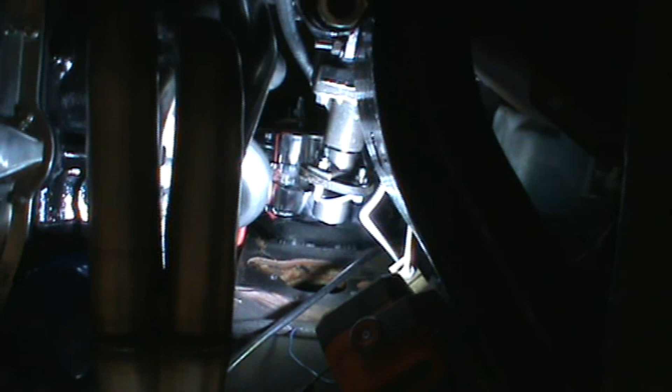You're looking straight up from underneath the car. This is the end of the Borgeson steering gear. This is the hole where the shaft from the steering wheel comes through.

It doesn't look to me, when I go from the other side and look, but I can't get a camera angle on it, that this is lined up with the center of that hole. And that could be a problem because there's not much, if any, movement on the Borgeson unit because those holes are drilled into the frame, and I don't think there's much give there.

There may be a little, and it probably is enough because they're selling this thing. But this part right here is the foam, the carpet padding if you will, from the inside. So that's going to go up some.

And to get the steering column through, there's a lever on it that locks the steering column when you have it in park. So that's got to go through this slot right here as you're putting it in.

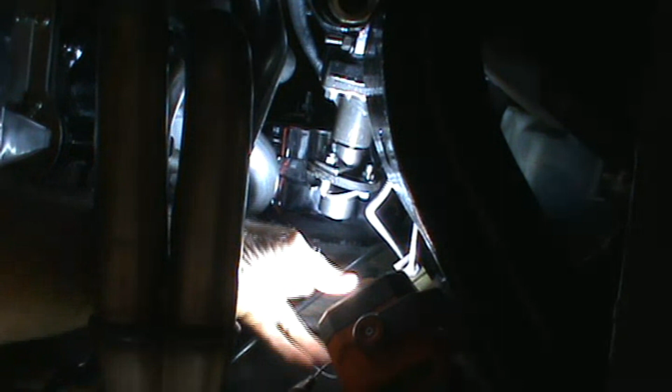And I think there's a plate that I haven't found yet that goes on the outside of this and sandwiches the firewall between it and the plate on the steering column. But one of the things they have you do is measure how far that steering column's got to go in there. And that steering column has to be compressed a little bit.

It's a collapsible steering column for safety issues. But okay, enough about that.

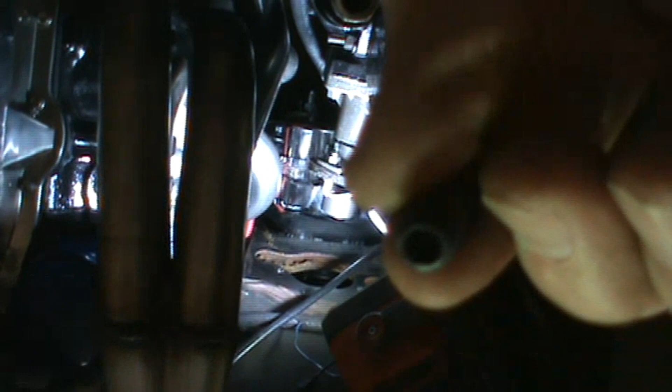What holds it in is a set screw. This is another case where you have a car that's all SAE measurements, and this, I don't know if you can see it here. Let's see if we can turn some light on it. Nope, wrong button.

It has an Allen wrench slot in the head. That's a 4mm Allen wrench that you need to tighten that on with.

And there's a nut that once you get this tight, you screw it in on top of it and it holds it in place. That is a 13mm. So I'm going to just start this a couple threads, not enough to get it through.

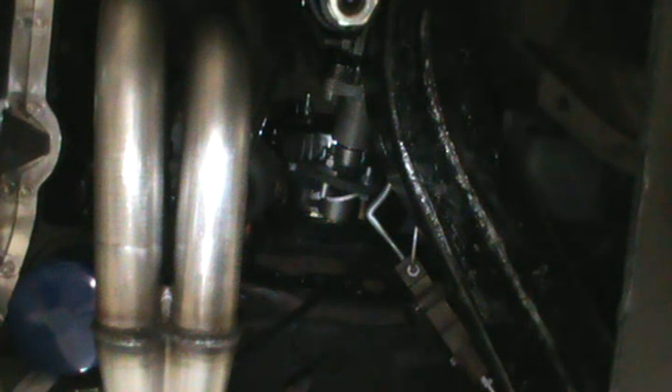That didn't work well. I lost my light. So I'm hoping you can see that. I've got it started in there,

but I'm not putting it in enough that it would hit the steering column. I can just feel it starting to get through. And then, before I lose it, there's a nut

that goes on top of it to lock it in place. That is a 13mm. So try to get that started. But leave enough room so that I can tighten the set screw down on it.

Now they say to measure between here and here, and then add 3/4 of an inch for engagement in the rag joint, which will give us a little bit of flex if it's not lined up perfectly.

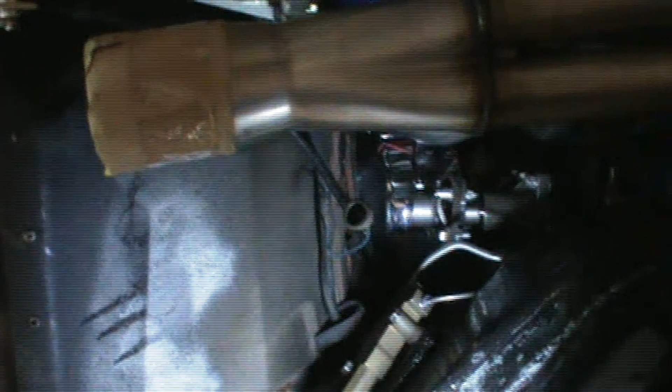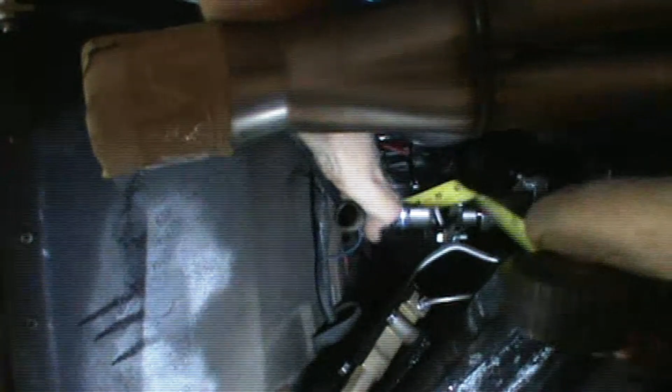So I just went over and confirmed the measurement, 7 1/4, on the other side, on the shaft steering column itself. I'm going to re-measure this. If you've ever done any carpentry work, you've heard the expression measure twice, cut once.

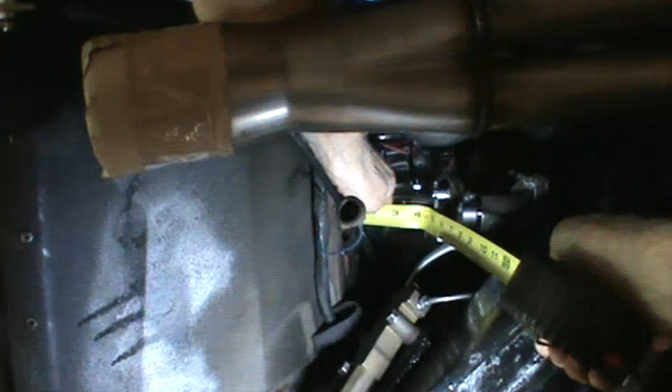I think that applies to steering columns as well. So that looks like about 3 1/4 right there. Add 3/4, I'm sorry, 3 1/2. Add 3/4, and you got 4 1/4. I'd rather make it long than short because they say it's really hard to get it back out. And I was correct in assuming that if I compress that, it's going to take most of the collapsible column out.

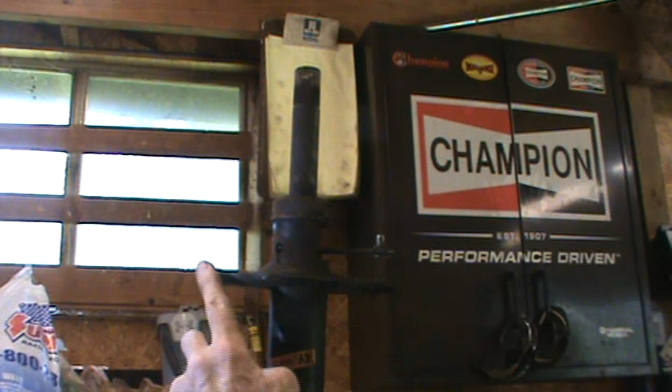Okay, I'm trying to get some light on the subject here so you can see that. I put some light on it, but it's still hard to see, so I'm going to point out this is the plate that goes up against the firewall from the inside.

This is the bracket that is going to go from the outside of the firewall and hold it in place. It's got to go around this. That's why this one screw is just a nut and a bolt with it, a carriage bolt actually, so that there's a square hole here.

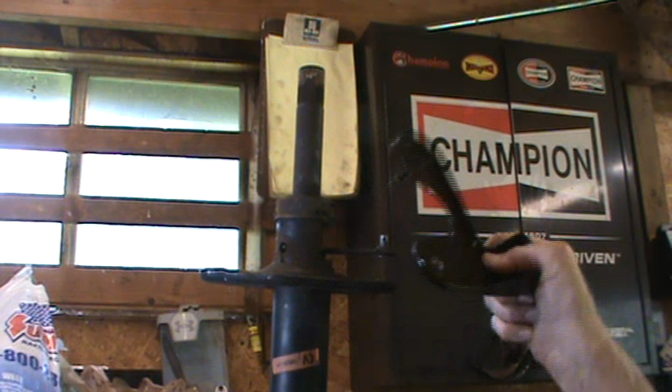But that one is going to go from the outside of the firewall through this, sandwich that thing into the firewall, and then from here to here has to be 4 1/4 inches.

And if I measure from the inside of the firewall, that's probably not going to show up exactly right, but 7 1/4. And I was trying to measure it parallel to the shaft so that I'm more accurate, but due to the camera angle, I'm sure I can't show that. But take my word for it.

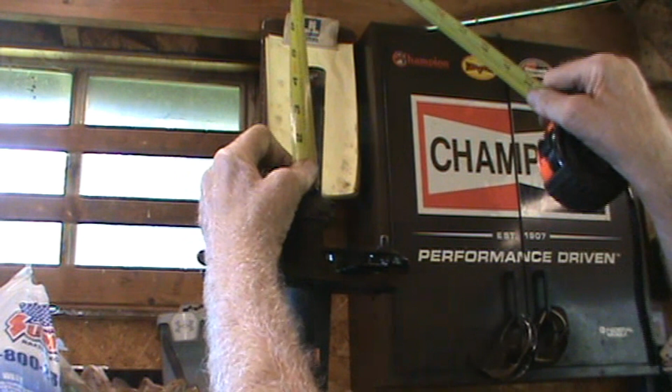So the point is that that shaft has to be compressed 3 inches. 4 1/4, 7 1/4 minus 4 1/4 is 3. So that is basically up to the spline on this thing.

I don't think this part below compresses, but the other issue I may or may not have is whether the plate that goes up against the firewall will go on the shaft itself, will go through the opening that I have between the vintage air conditioning duct and the rest of the gauge cluster, etc., that's up under there.

So, and I think actually this lever, the steering wheel lock, is in the - I kind of misspoke before. The steering wheel lock is in there.

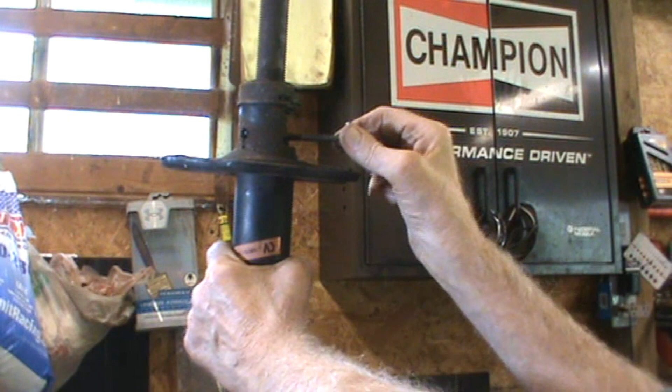So I'm sure that when I unlock the steering column, this will move, and that goes to the transmission to keep you from taking it out of park unless you actually have a key. So-

I think my next move is going to be to just see if I can get that thing in through the vintage air duct and under the steering column, or under the dashboard. I guess I should compress it some of the way before I do that. They didn't give you any tips on how to compress it, so I'm gonna double check 3 inches. From there, 3 inches is right there, right at the splines for the thing.

So I think I'll compress it some, confirm that I can get it in through the vintage air ducts without disassembling some of that, and then put it in and do kind of a test fit, because the last thing I want to do is push that thing too far in. I'm pretty sure my measurements are accurate, but it would be a disaster if I pushed it in too far and can't get it back out.

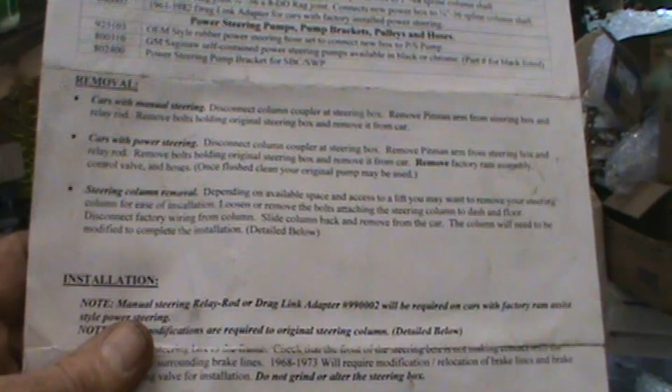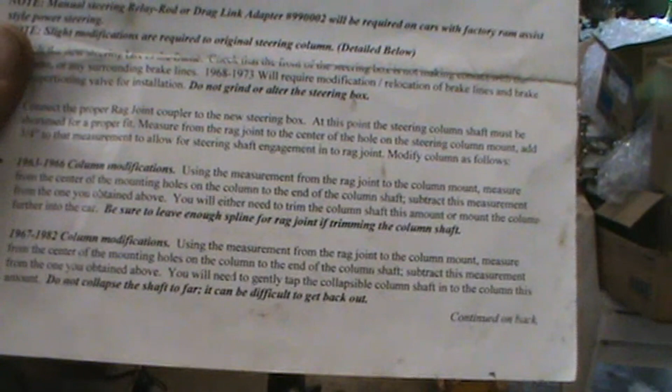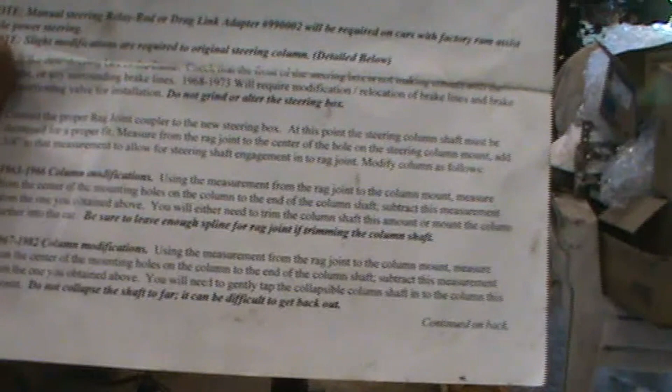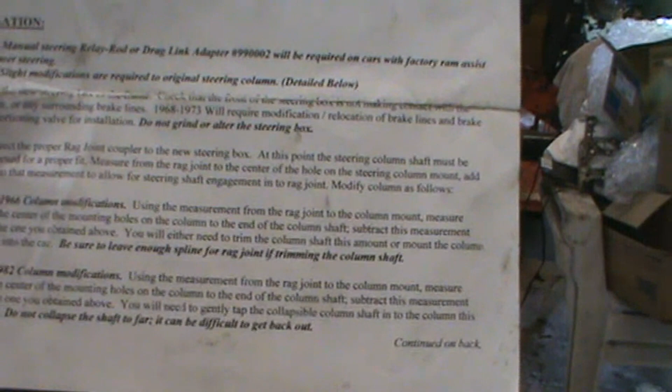Okay, so on installation it says 67 to 82 column modifications using the measurement from the rag joint to the column mount. That was the 4 1/4 inches. Measure from the center of the mounting holes on the column to the end of the column shaft. Subtract this measurement from the one you obtained above. The one you obtained above was measure from the rag joint to the center of the hole on the steering column mount.

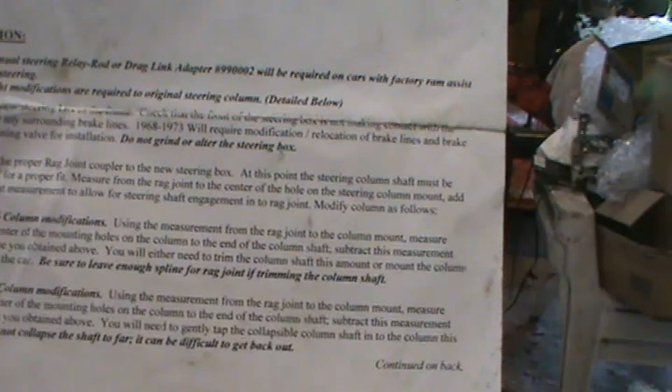Add 3/4 of an inch to that measurement to allow for steering shaft engagement into the rag joint. Okay, so that's 3 inches. I think I need to collapse it.

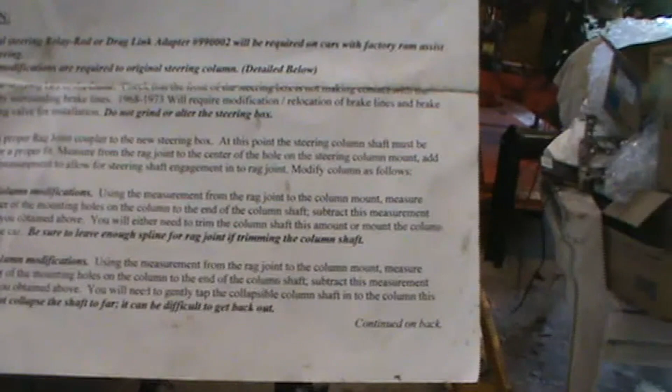It says you will need to gently tap the collapsible column shaft into the column, this amount. Do not collapse the shaft too far, it can be difficult to get back out.

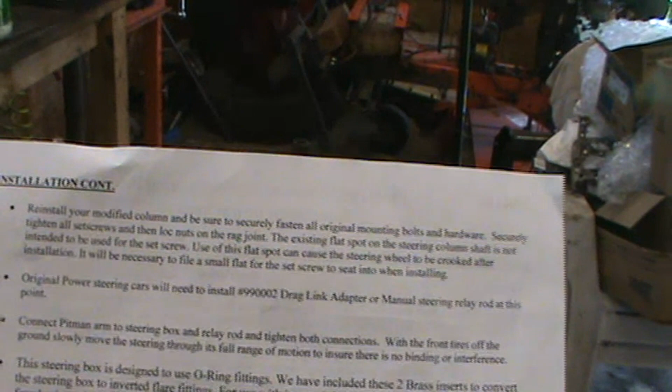The other significant thing in these instructions is it says reinstall the modified column. Be sure to securely fasten all the original mounting bolts and hardware. Securely tighten all the set screws and then the lock nuts on the rag joint. The existing flat spot on the steering column is not intended to be used for the set screw. Use of this flat spot can cause the steering wheel to be crooked after installation. It would be necessary to file a small flat for the set screw to seat when installing.

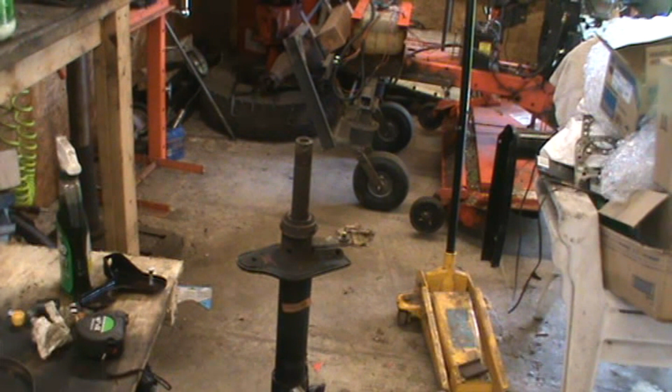I don't know if you need to have a flat for that set screw because it's going to engage with the ribs in the steering column, and it's going to be hard to figure out where you need to file that under there, and if you have it under there it's going to be difficult to file it. So I think I'm just going to get that set screw good and tight and go from there.

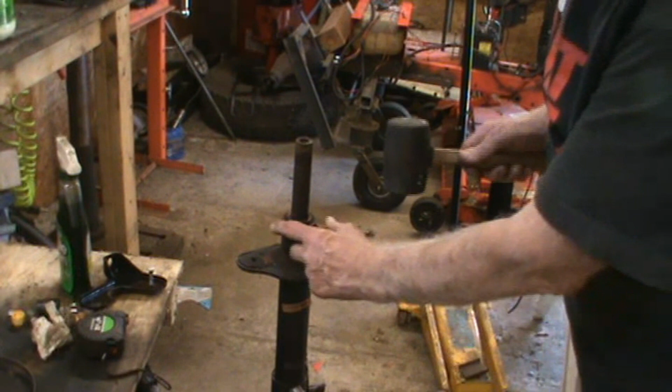So I'm going to start to gently tap this with a rubber mallet. I don't know that that's doing anything because that's more than a gentle tap.

I'm going to take it to the next level, which is a dead blow hammer. And I'm going to not so gently tap it with a dead blow hammer.

Feels like the steering column is shortening, but it feels like it's the adjustable column up there, or down near the steering wheel, that's actually doing the changing.

Okay, the next thing I'm going to try is a block of wood and a steel hammer and see if that does anything. But before I do that, I'm going to clean up that shaft a bit so that if there's anything on it, it won't prevent it from going in.

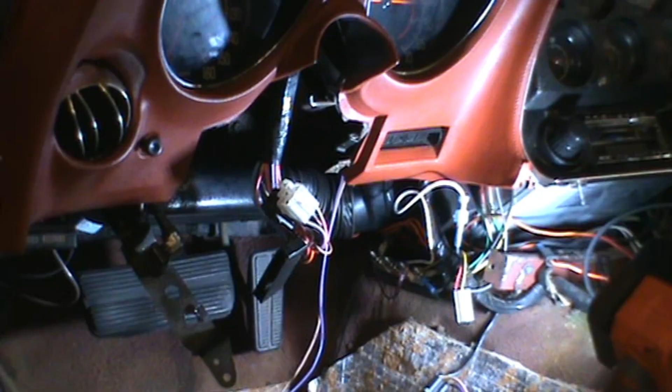So I was looking for how much room I was going to have to get the steering column in here, and it looks like it'll go.

But in the process of looking for that, I was checking out the connectors I have to put on the steering column, and I saw this one little lonely black connector, if I can find it here to zoom in on it, right there. And I was like, where does that go?

So with a little investigation, I noticed that right up in here, I gotta see if, right up in here. Make sure that that was in the frame. And I think it was. I'm going to raise it up a little bit. There's a tab, and that is probably the ground for the entire dashboard. And if I hadn't noticed that...

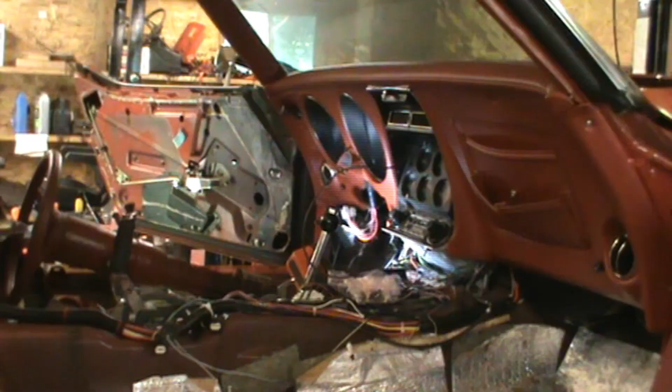Okay, I've got the steering column in the car. You can see it, there's the steering wheel and there's the column. And there's a couple connectors here that need to be connected to those wires there.

So instead of having me running around the car trying to zoom in, and I don't know that I can leave this steering column unsupported, I'm going to zoom in to where the connections are going to be made and show that close up. I think that will be a decent angle.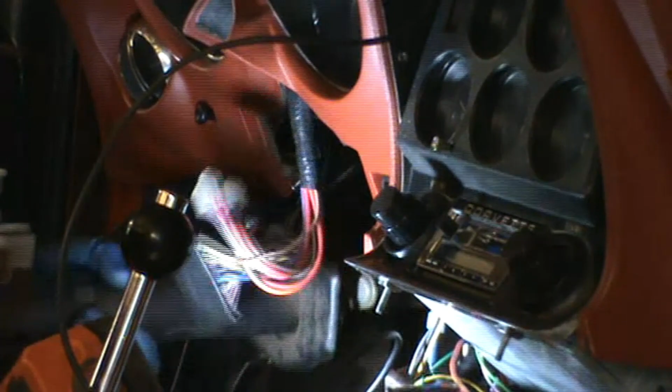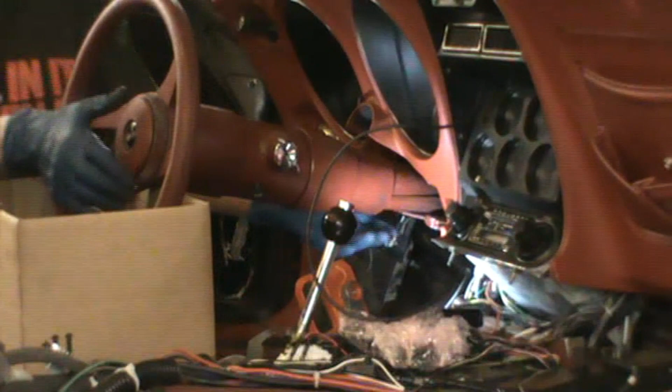So, try to get this. You notice I have a box there supporting the steering wheel. I'm about an inch too far with the shaft to meet the rag joint, so I have to pull the shaft out about an inch. See if I can align it and then push it through one way or the other. I'm going to try not to turn it. Now it doesn't come out.

I don't think that was quite far enough, but I'm going to try to see if I can see it. Maybe I can look down from the top if I get a step ladder here, because I don't want to pull it back any further than I absolutely have to. And raising and lowering the lift and doing it a bit at a time is probably going to be time consuming. So let's see if I can look down from the top and see where we're at.

Got a ladder here next to the lift. Should have done this when I was younger. Okay. Can't really see it from up top because the brake booster is in the way. Oh, I can feel that I'm about a quarter of an inch. I just popped it down. Almost lined up. It's about a quarter of an inch off.

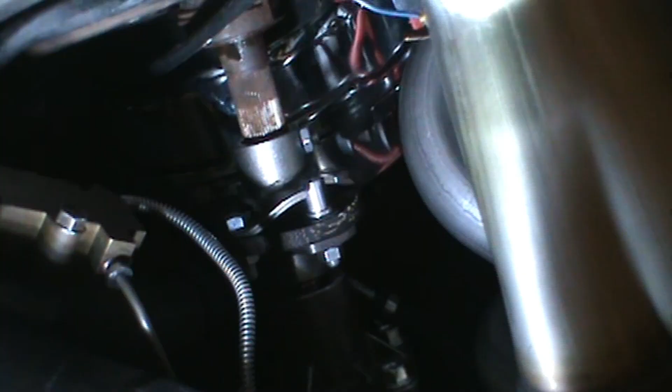So this is the view from underneath the car. There's where I am with the shaft and the rag joint. I'm just a tiny bit off. It could be aligned a little bit better, so I'm going to try to loosen the steering gear and see if I can pivot it just a hair. Trying to find out which wrenches I need to do that. It's a 9/16 it appears.

I don't know if I'm going to be able to pivot it even if I loosen it, so. But it's worth a shot. So there's 3 bolts holding that in. I'm going to loosen those all if I can. Top one might be a little bit tough to get to, but if I get 2 of them really loose, maybe I can pivot it just a hair. That's really all I need. So I've got the 1 bolt loosened already, at least started. Let's see if I can get the second one started.

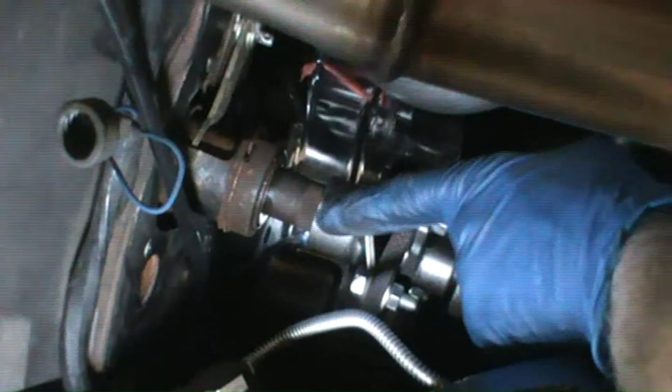I'm going to see if I can get a socket in there and have it easier. So with jiggling and prying, I finally got that through. And you can see the splines right here going into the rag joint. And the little lever is here for locking the transmission in park. It also serves another function, is you can't turn the key off unless it's in park.

Okay, kind of forgot where I was on that video, but it appears I've got the shaft in what I think is far enough into the rag joint. I wish I had measured that splined area to know exactly how much was splined, so I could tell if that's the 3/4 inch into the rag joint, but I think it is.

And now I'm gonna try, and I don't know if you're gonna be able to see this, but the bracket that holds the steering column to the firewall, I'm gonna see if I can slip that in there without getting too much in your way. I don't know, I might not be able to get it underneath the lever for the lock.

Just a wee bit tight, I'm gonna have to push that in. In retrospect, I left that a little long as an abundance of caution for making sure it fit, and now I'm thinking that maybe wasn't a good idea. It would have been easier with that shaft being a little shorter, getting that little lever through the firewall first, then lining up the rag joint with the splines.

If I can't push that in, which based on how easy it was going in tapping, I think I can. But if I can't push it in, I'll take it out, tap it in a little bit more, and put it back in now that I know it will go.

So the plan to try and pull that last inch in, compressing the column by putting the plate on, isn't going to work because the screws weren't long enough. So I had to pull the thing out.

In the process I disconnected the vintage air duct right down in here, which will make it easier to get the column back in, but getting that hose on that duct was a real chore. So I've caused myself a little bit of extra work. There's the place where it's disconnected. You can't see where it connects because the hose is in the way, but I need to reconnect that.

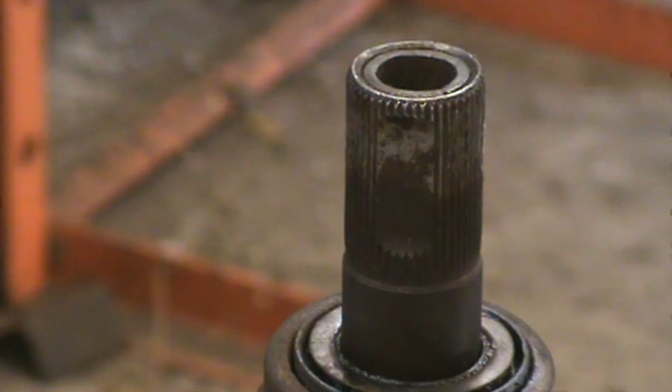I'll take you over to the steering column and show you what I found out. When I had it in there and couldn't get it compressed all the way, I said I should have measured this splined area so I'd know how far it was. I can tell already it was in all the way, because the splined area is about 1 3/8 inches, and I was only showing about 3/8 of an inch, so it was all the way in.

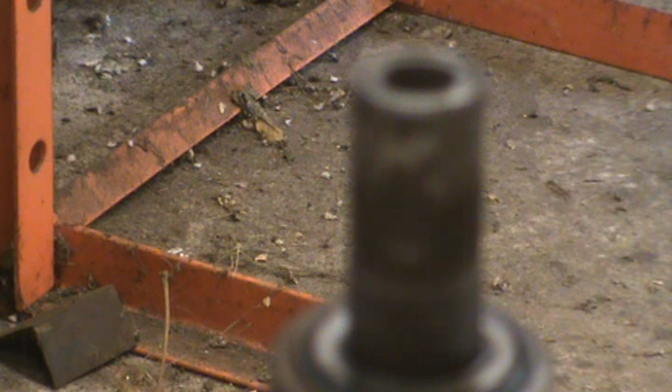Now that I know that, I'm going to make it easier -- I'm going to collapse it all the way, as far as it should be collapsed. Another thing I confirmed while under there is that I really don't need to worry about that set screw, because by the time I collapse this and put it in all the way, there's no way it could pull out. There just isn't any room.

I'm going to put this further in, and I think I need to re-aim the camera because the column is going down -- the adjustable steering part inside the car, where you adjust how far you want it from you. Now that that's like that, it'll make it easier to put this in, because this won't be running into the rag joint before it's through the column or the firewall.